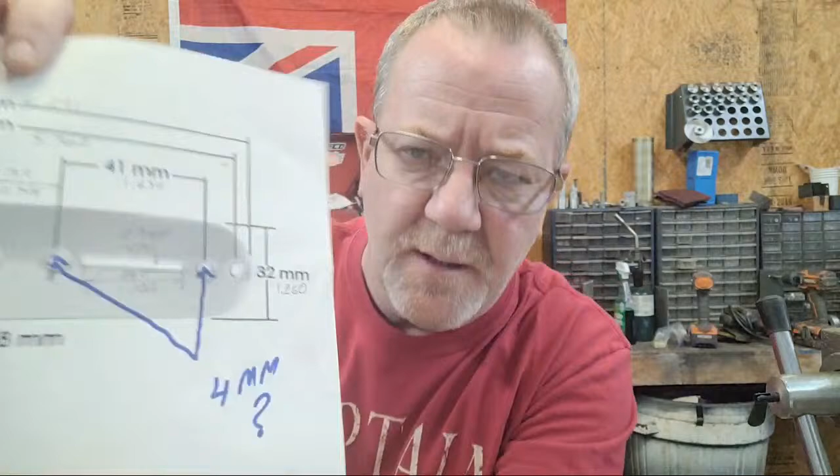And the only other question I had, and we'll talk more about the print here in a minute, was on this print. I'll show it to you. These two holes right here are the holes that you don't want me to countersink, right? My other question, are they also 4mm? Because on this print, it shows that hole is a 4mm hole, and that's the only reference I get to any of the holes.

So if you don't mind, be a good chap and measure that out for me so I don't overcut it. Other than that, I think I've got the print figured out.

I don't know how they do things over there, Carl. You may can enlighten me on this, but over here, whenever I do a print, if you look, the way that they did this print, they give you full dimensions.

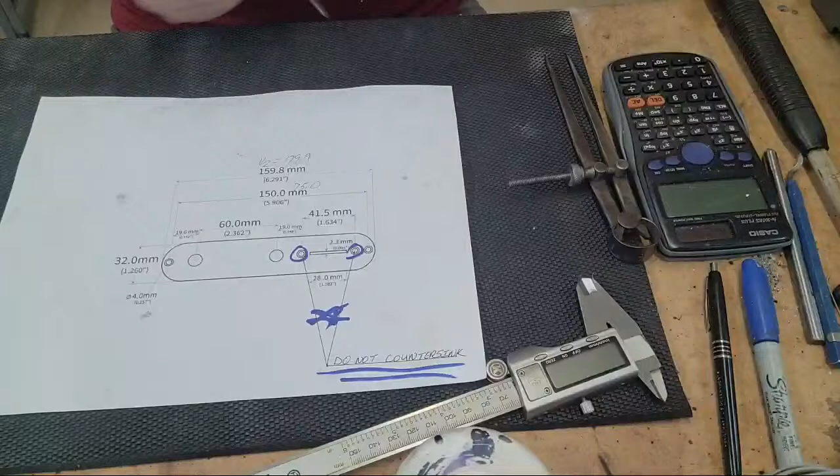Well, whenever I draw a print out, I'm going to turn the camera down to the deck here. Whenever I draw out a print, I usually pick an end that I'm going to start at, like this end.

Of course, I'll give the overall dimensions, but I usually start at this end, and I go - actually, hold on, I've got a picture of the way I do it.

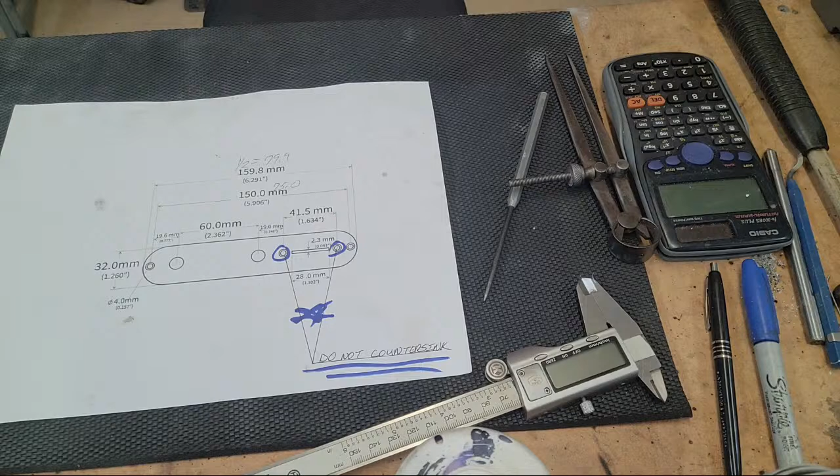All right, this is a little bit better for me to explain to you guys how I do things. So whenever I do a print, I have a starting edge. And as you can tell, each line represents the center of a machine portion. So this would be the center, that'd be the center, this would be the center, and I usually draw the measurements on these lines. Well, the way that this print is drawn...

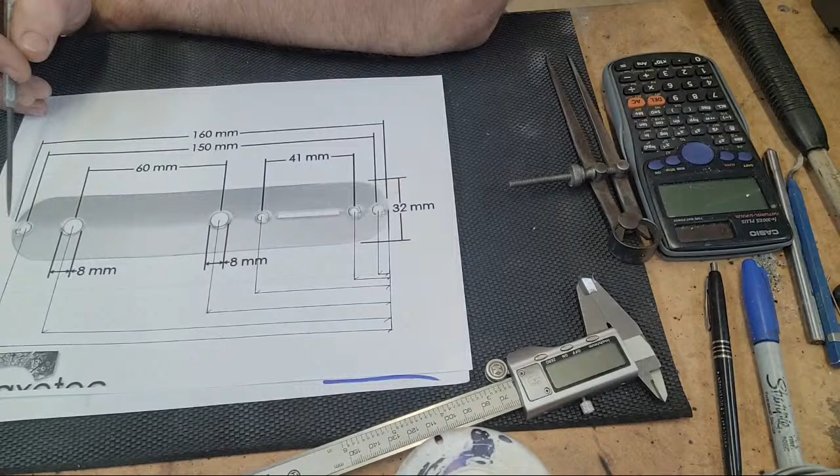It gives me the dimension from this hole to this hole, and then it gives me dimensions from this hole to this hole, and this hole to this hole. Well, aside from these little dimensions right here, I didn't really have a place to start. So what I had to do...

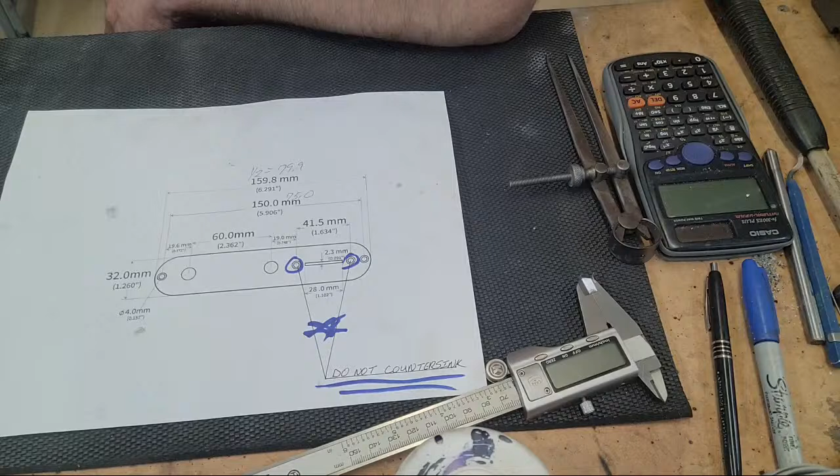And this is the workpiece we're going to be using tonight. I see Charlie just popped in. How you doing, Charlie? I enjoyed the song you did Monday. Good job, buddy. And did you see what Lamb just said also? Put a picture in the Discord.

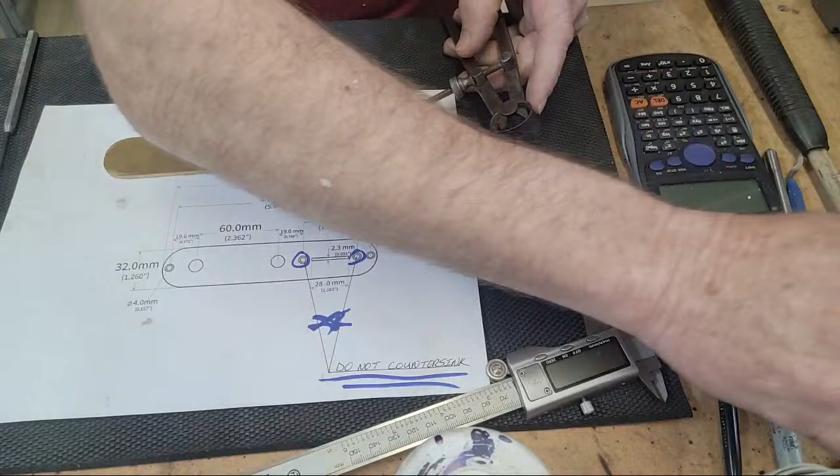Okay, thanks, Lamb. I'm going to pull that up on my iPad right now so I can see that. Okay, I can pull it too if you need me to. No, I've got dual screen on my iPad. Which one? On Lamb's Discord? Okay, you direct message me. I see what's going on now.

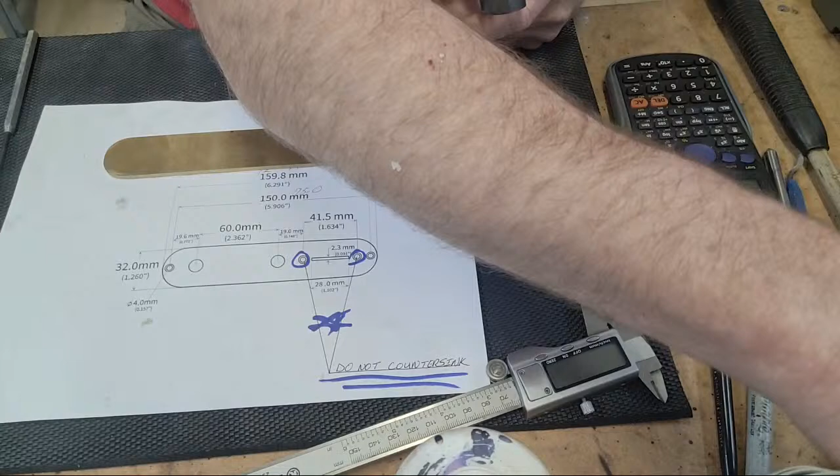All right, I'm having difficulty here. What is the problem?

Oh, okay, I'm assuming this is the picture of the screw holes, right? Okay, so they just used probably like a flat bottom wood screw.

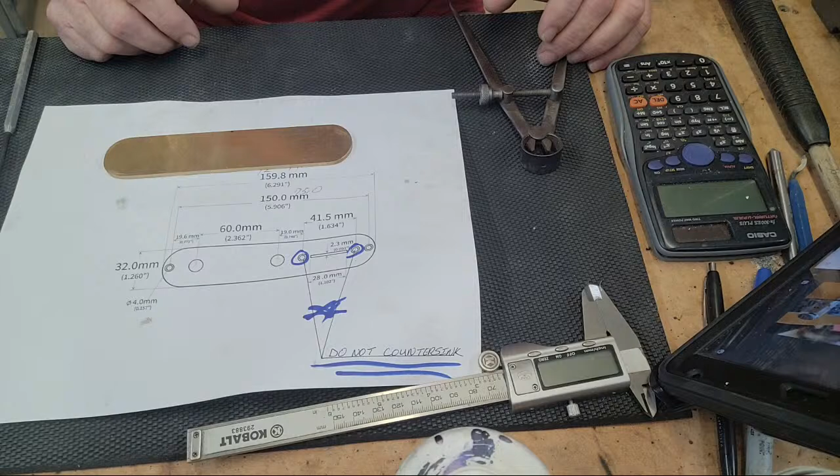Which brings me to another question for you, Lammy. I didn't think about screws for this. Do you have some stainless screws or some brass screws, or are you going to handle that on your end? Let me know.

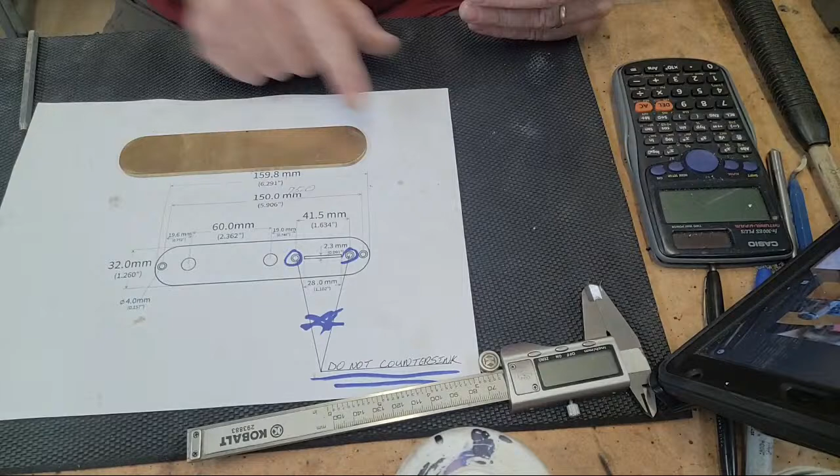But anyway, what I was saying, so I had to measure completely across this piece, find the center of it, divide it in half so that I could figure out and get the proper distance between these two holes, because I don't want these holes shifted one side or the other.

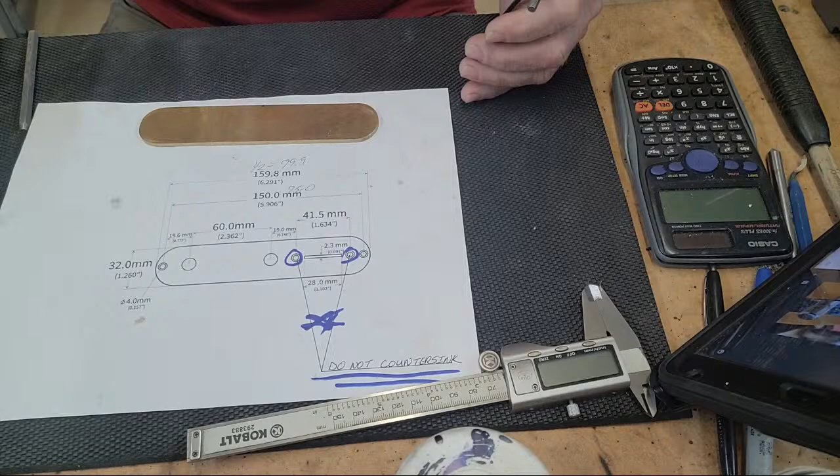So that's exactly what I did. I took and divided all the measurements in half and jotted them down. For example, this one's 79.9, which I've got set up on my caliper already. So I found the center off of this edge here, made a mark, and then I moved in 75 millimeters to this first hole. And we're going to lay all this out here in just a second.

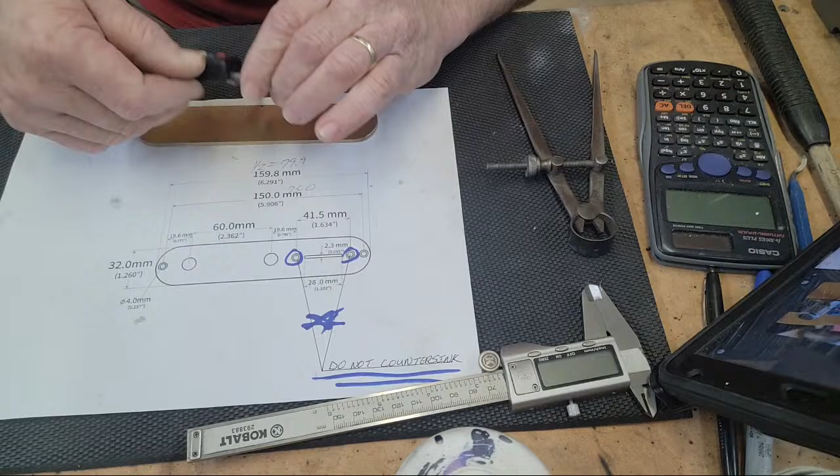But at any rate, I came back to my center point. I made a scribe line there, and then I came to the other side and made a scribe line. So that was really the only way I could figure out how to actually start laying the part out.

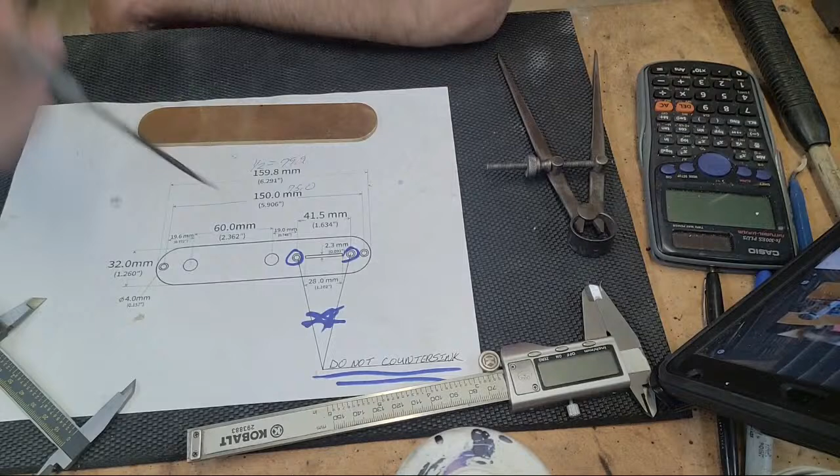So the print's a little bit different to me, but I'm going to be using the DRO. I think what I'm going to do is start in the proper location of this hole, and use the DRO to check these measurements between each one, if that makes sense to you guys.

So, but anyway, Lambie said he's going to use his own screws. Okay, did you catch that? I didn't, but I'm looking now.

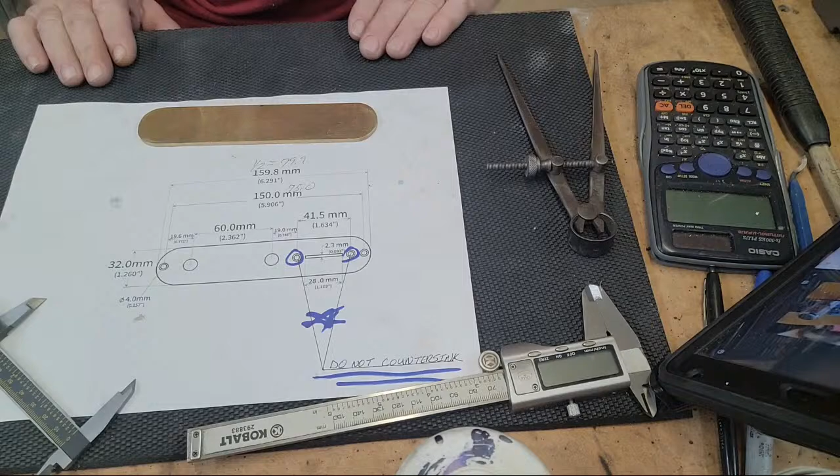Okay, let me get rid of this. I don't need this. I just found a feature on my iPad I didn't even know I had.

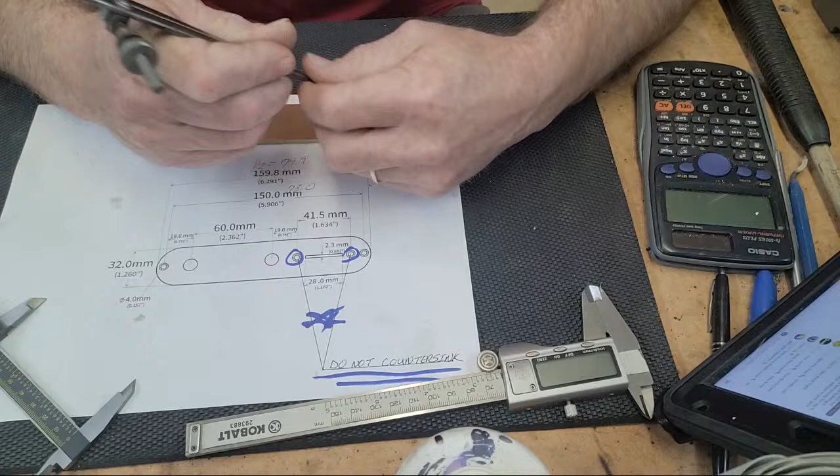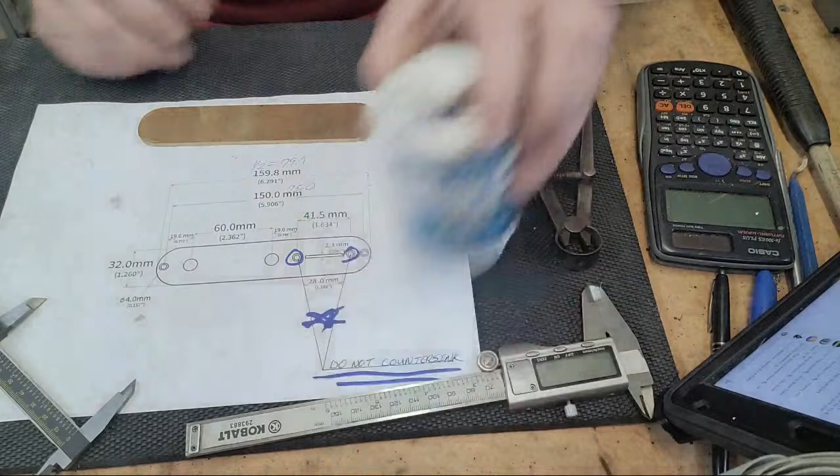And say hi to Tina, I hope everybody's doing good. Yes, hello to Tina, we hadn't seen her in a while, we miss her. All right, let me move some of the stuff out of the way.

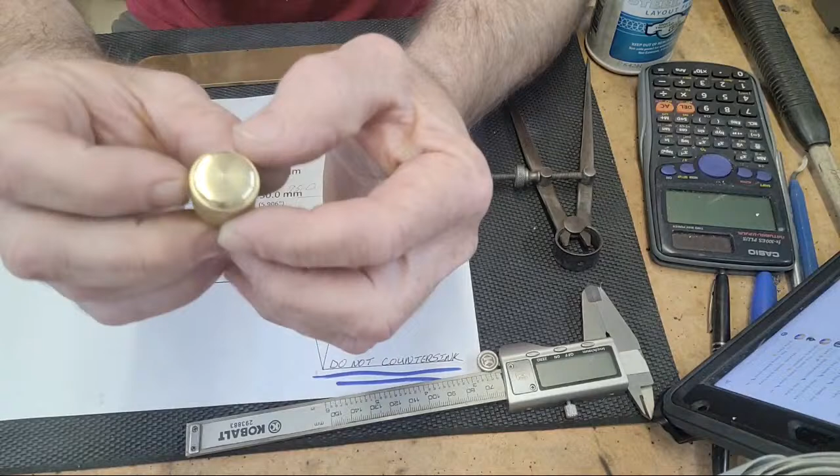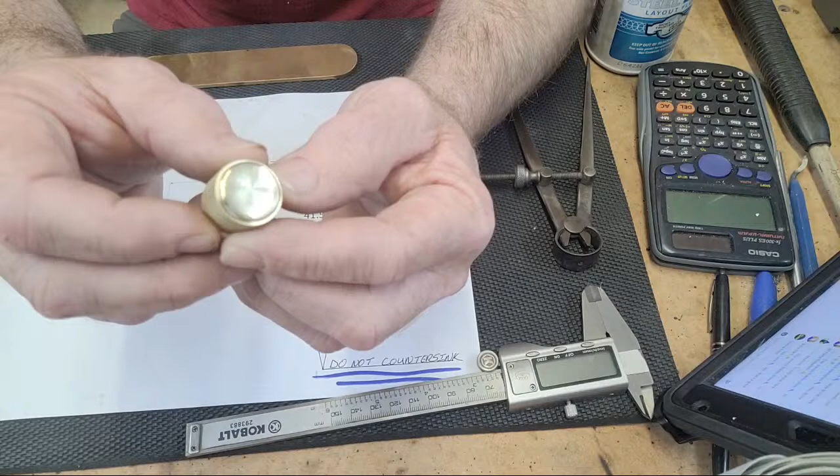By the way, for those of you who haven't seen them, this is one of the knobs that I built for Lammy. Lamb, you see how I turned that over on its edge? I'm trying to get it on the TV where you... there we go, how does that look? I hope you like that. Yeah, he likes it, he says. Fantastic, all right, good, good.

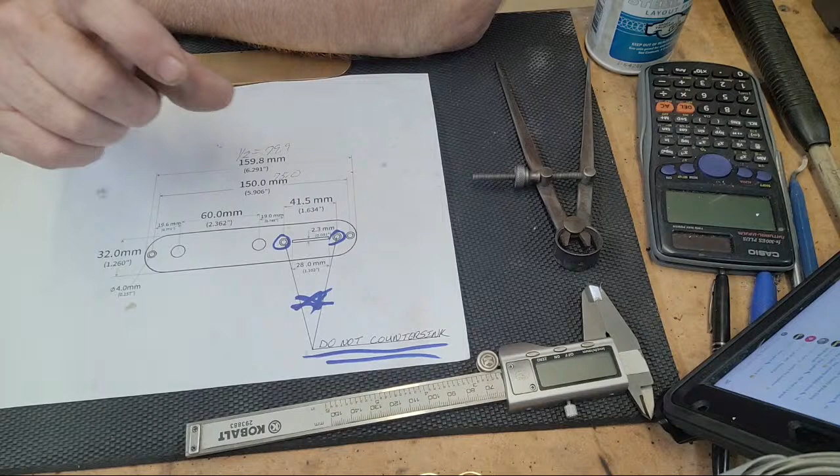So I was talking to some of my buddies at work, telling them about the stream, what we were going to do tonight. And the biggest concern I have with this entire project is this slot right here. That's a 2.3mm slot, and it's 125 thousandths thick material. Well, the only thing I have that I can cut that with, the best thing I want to use, is this little bitty end mill. This is a 2mm end mill.

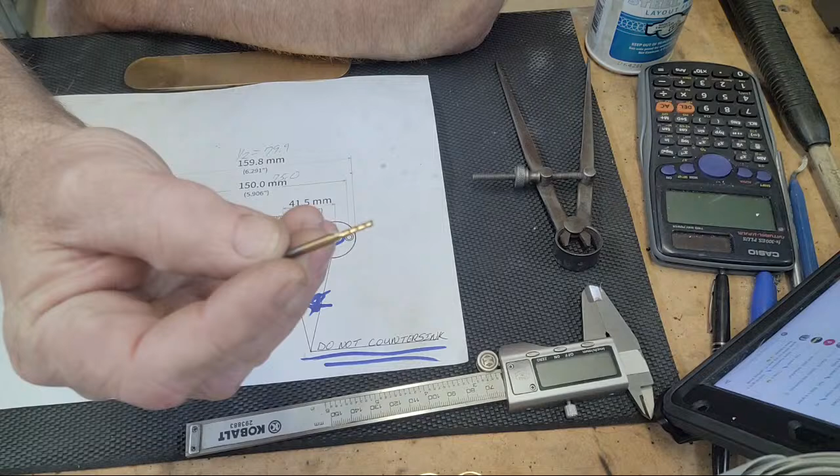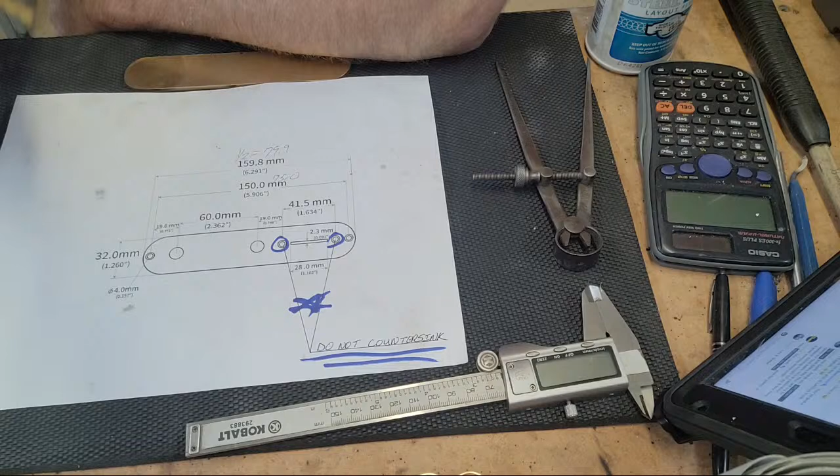Camera's having a hard time focusing. There we go. So what I'm going to do - the way these are made, I can't plunge into the steel, or the brass rather, like a drill bit, because it will break them. These things are super fragile. So what I have to do is drill a pilot hole that's 2mm to stick this down in, and I'll drill one on each end. Then I'll drop down in that hole, and I can only go 10 thousandths at a time - that's the maximum I can do on this bit. This bit's supposed to turn at, I think, 6,000 RPM, and my machine only goes to like 4,500, I can't remember. So I can't get the bit turning fast enough, I have to slow everything way down. But I've used them - they work good in the right configuration and material and all that. You just got to work with your speeds and feeds. Carl, I'm sure you know all about what I'm talking about. But at any rate, that's going to be the end mill we use right there, and it is tiny.

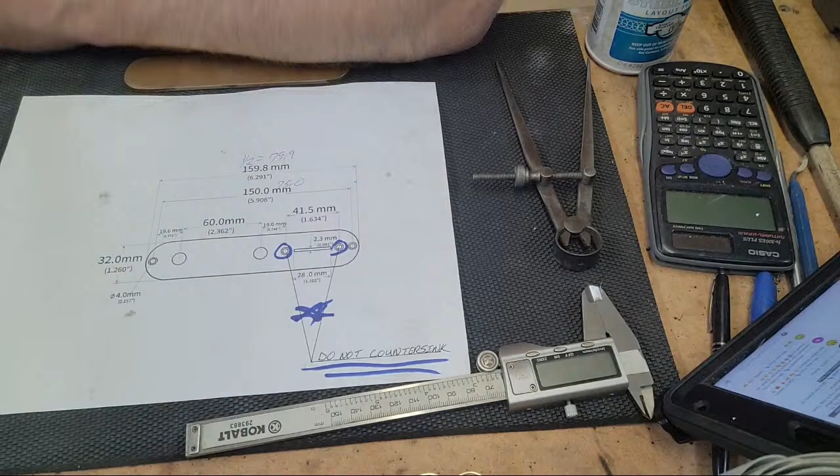I got a couple of things. Okay, if you don't care. Number one, I think I read this right, that today might be Joe Clark's birthday, they're getting ready for a celebration. Oh, really? Yeah, so happy birthday, happy birthday, Joe Clark, happy birthday buddy. And Stigster is here.

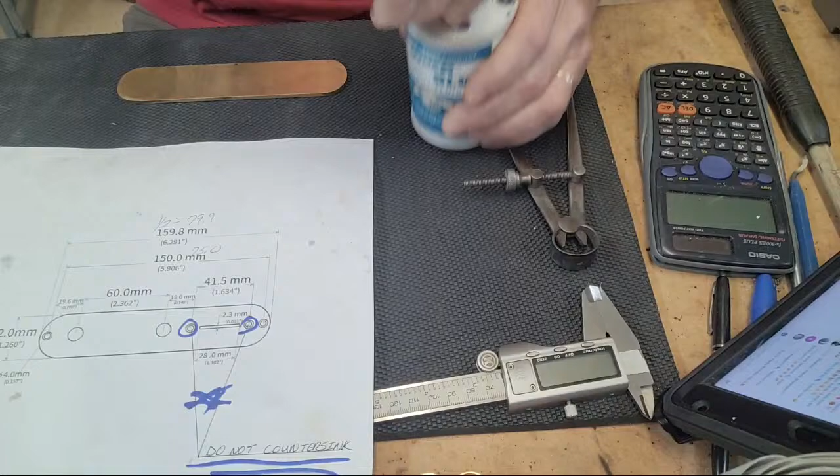Hey Stig, Stig, and Swanton77, how you doing buddy? He's up at the mountain. Yeah, you're in your cabin, right, up in the mountains? And he says it's -2. Oh, God, no, woo, nope. Stig, you'll be coming to see me, brother. I'm sorry, but that ain't going to work for me. You're going to have to come down here where it's warm. I couldn't handle it either, that's too much for me now. Hell no, that's too cold.

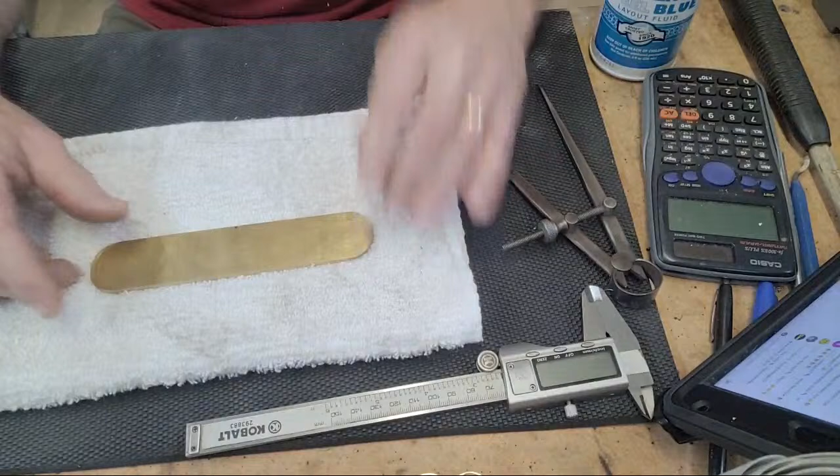Lambie wants to make sure to let you know to give her plenty of lube. I will - actually I have to use, well I can use the aluminum cutting oil that I usually use. What happens on these slots, because I'm cutting such a small amount off at a time, it's almost like pixie dust or something, it looks like glitter. And if I use the other oil, it ends up balling up in that little bitty slot and tries to break my bit. So what I usually do - the first cut, I'll go ahead and use the aluminum cutting oil, and from then on out I just keep my air blower close to it, and I'm able to clean it out so we don't have any problems.

Yeah, Lee, I think Lee knew what was coming next because he said butter.

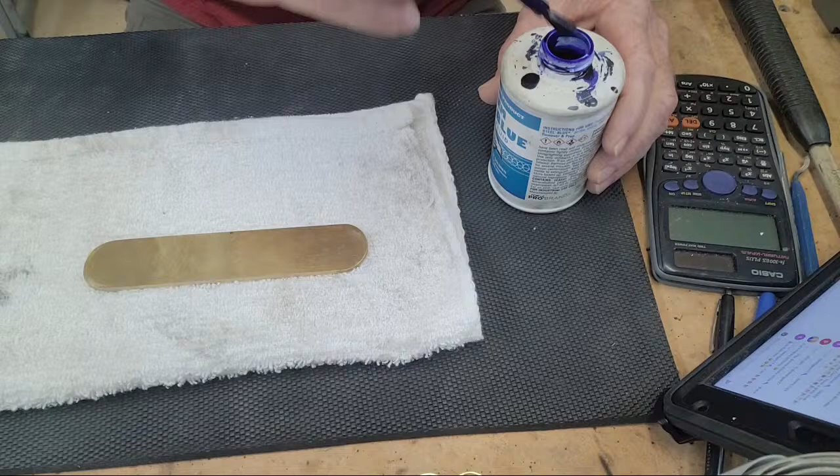I'm just going to take some marking dye, layout dye, go right down the middle, get that. It doesn't take very long, and we'll start setting up. Like I said, I'm going to go ahead and scribe these holes, but I'll be interested to see what the DRO comes up with as far as the accuracy.

There's my 2 start holes right here. Make a straight edge. Okay, where is it? Captain, have you lost something?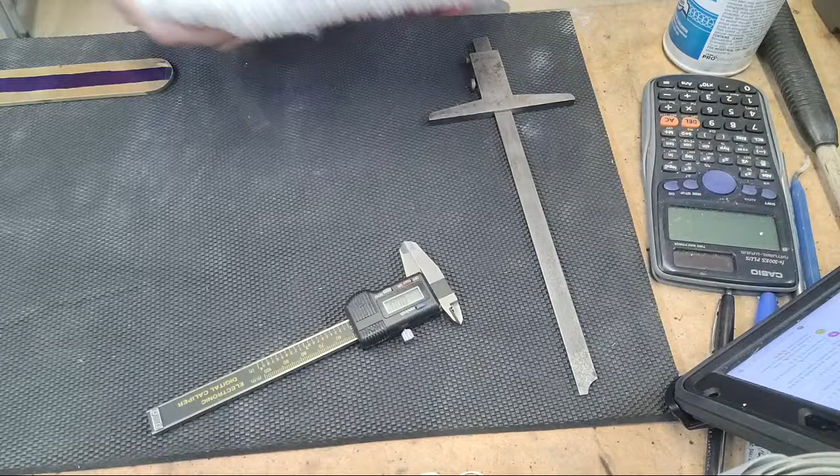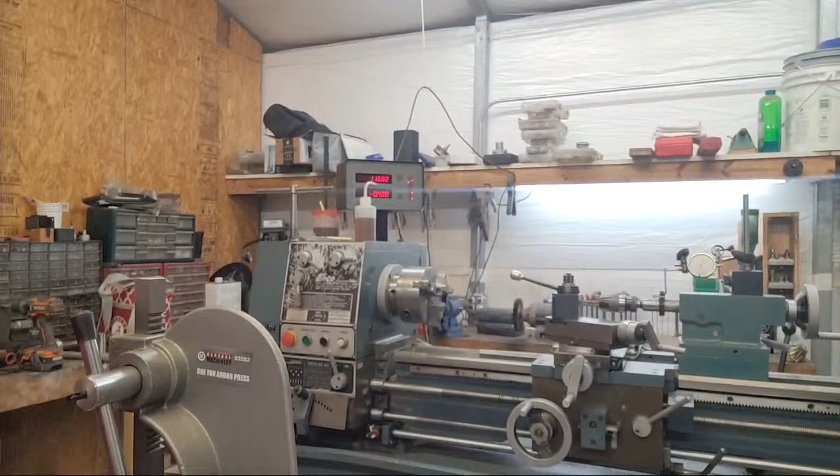No, I found it. Okay, while you're getting ready, can you explain to Lee what DRO is, please? DRO is an acronym for digital readout. Let me pan the camera over here to my lathe. This is my DRO, okay? And what it does, you've got 2 axes. This is the x-axis, so whenever I move the carriage, you can see the numbers move and change. And I can zero it out and come back to the same number. The one on the bottom, if I zero it out, now you can see the cross slide going in and out, or the compound rather. This is the DRO that was in a couple of video backs that I lost my ground in my shop, and it just burned it all to pieces.

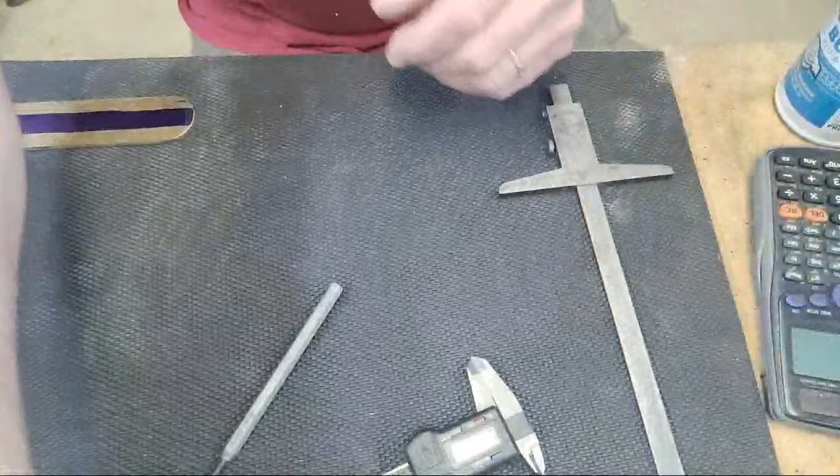Well, thanks to Mark Dennison, I was able to repair it myself with his help and guidance without electrocuting myself, and it saved me about $400 on shipping. I would have had to ship it out to California to get it repaired, and they didn't act like they even wanted to mess with it anyway. So I reached out to Mark, and I'm like, hey man, I'm dying here. And that's a very important tool, because without that tool, you can see most everything I have is digital. I do have some analog needles and pointers and that sort of business, but without the DRO, man, it makes it hard.

Okay, a couple of quick things. Phil likes the smell of the blue stuff. I do too. And Charlie Gabaldon says milling dust is man glitter. I think that's cute. Good one, Charlie. That is a good one.

Dutchman is here. Hey, Dutchman. Glad you could make it, buddy. Glad he came, yes. We're just getting started.

I'm just now laying this thing out, and it'll take me just a little bit to get all the marks where I want them, but hey, that's part of it, right? Mark Dennison says, yeah, we fixed that mother good. We did. I just did what Mark told me to do and tried not to shock myself. Mark did a fantastic job of walking you through that. He absolutely did. That's like his forte. That's his lane. He's really good at that stuff.

All right, I got the first 2 holes laid out, set up for the second holes, and they're going to be 75 millimeters apart. I'm sorry, that's the halfway point between them. I'm getting some real quick.

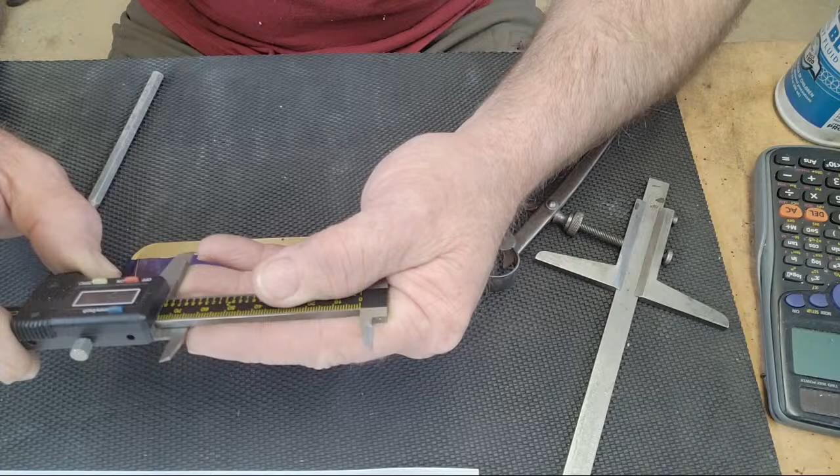Don't let me bother you. Marky D asked a question. I'm going to try to answer it. I don't know if you guys can hear that banging on the door out there. That's one of my dogs leaned up against the door, scratching herself.

Marky D had a question, and I wanted to smell it because he said, can you describe what the blue stuff smells like? Phil may disagree with me. I think that it smells like a really strong nail polish. Strong nail polish? Uh-huh. That's what I think. Yeah, it kind of does.

All right, next hole. Off of that hole, which hole did I go? We're at 19... keep having to... 19.6 millimeters. Is that right? That don't sound right. Yeah, that is right.

And I'm doing this entire part in the metric system. I don't believe I'll be using anything SAE or standard or whatever you want to call it, because I'm really curious to see how accurate my DRO is versus how accurate I am in laying these measurements out.

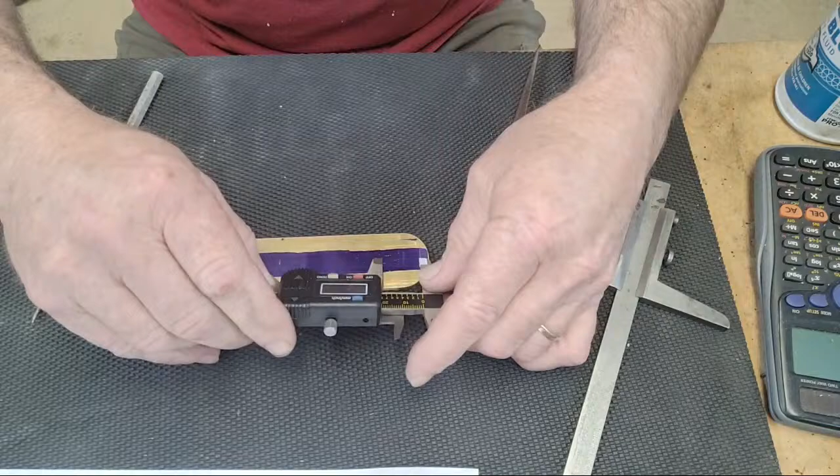All right, there's 19.6, and that's off of this hole. So we'll make a tiny mark there.

Take the straight edge. And Gunter is here. How you doing, Gunter? We're just now laying out this little part to get ready to start machining.

Okay, there's that hole. Now the next hole off of that one's 60 millimeters. So we'll stretch that out 60.

It depends on how, yeah. Well, I'll tell you, I calibrated it and I was shit-faced when I did it, so. Anyway, it is what it is, right? I was so happy to get that working. Man, I was happy about that.

The problem with the DROs nowadays, my DROs are about 10 years old. And for you computer guys out there, how good does computer stuff work after 10 years? Yeah, not very well, right? So they don't make parts for it and all of that. When I called out to California, I was surprised they could fix it, much less. That's probably why they didn't want to. But anyway.

All right, 19 millimeters from that hole is going to put us, let's see, right here. And these are, again, just reference lines. All right, that gives me that hole.

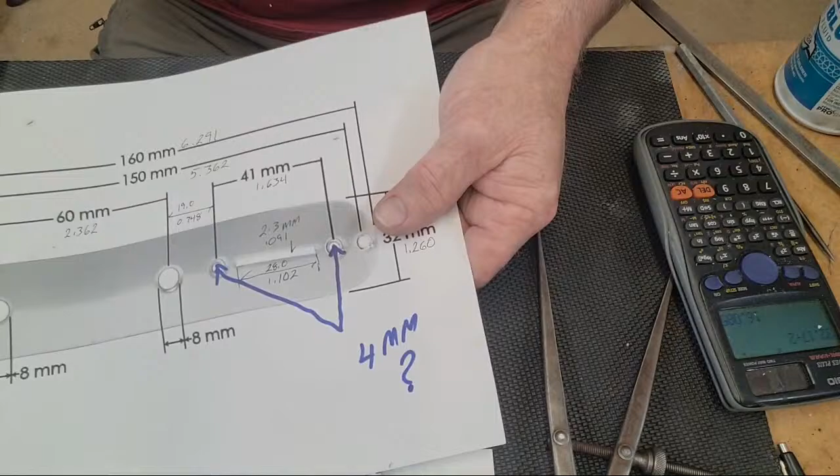I'll do the slot. I want to get the holes cut and countersunk, and then take a look at it, check everything out, because I don't want too many operations going at once. I'd like to do the drilling operations and then come back and do the milling operation. So that's what we'll do.

So I'm going to leave you right here for a second. I'm going to go set this part up in the milling machine, and I'll come get the camera and drag you guys over here. Give me just a second.

Actually, I think I'm going to use this other camera mount. I'm going to switch you guys over to a tripod. Let's see if that does better for what we're doing.

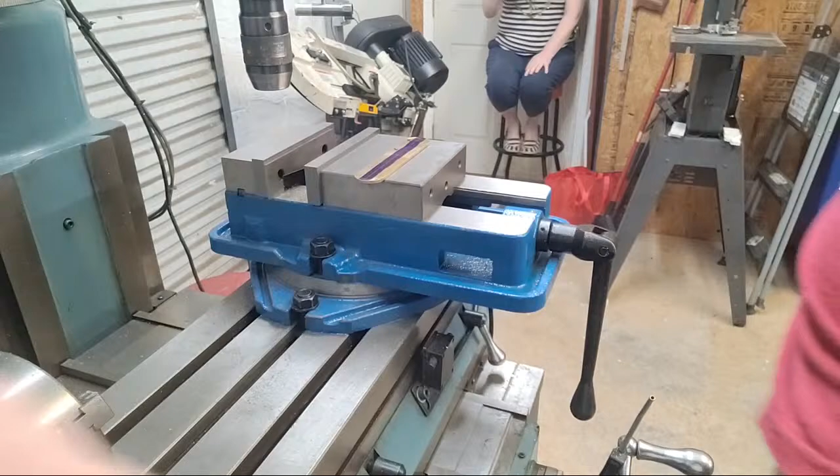Okay. I wonder if I can zoom in with this thing. Way too much, way too much, way too much. All right. There we go. You guys see that okay? Yeah, it looks pretty good on my monitor.

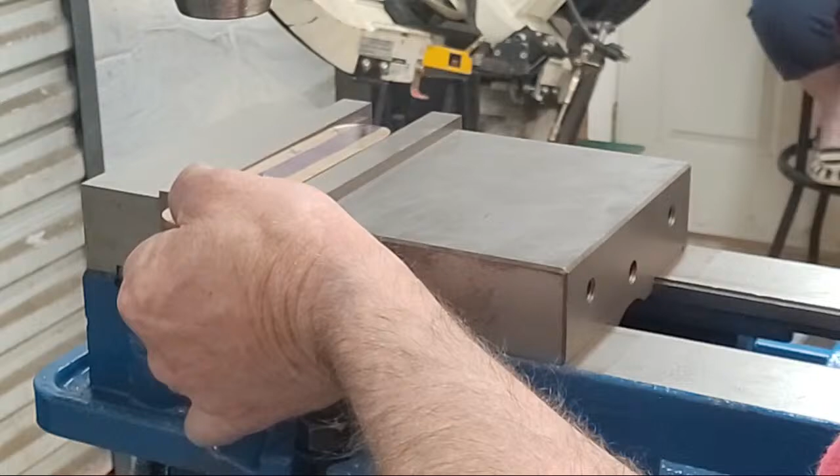Can I read something real quick before we get started that Dutchman says? Dutchman has a lot of experience, remember he used to do a lot of machining before. He says, Captain, you would love having a toolmaker's microscope with DRO, X and Y, micrometer heads to measure your work for small stuff. Yes, that would be badass. I'd love to have that. I'm not sponsored either, so if anybody out there wants to sponsor me, I'm just throwing that out there. You wouldn't turn it down, would you? Hell no, I wouldn't.

All right. Let's see. Let me untangle wire.

Somebody asked me the other day what that humming noise in the background was, and what that is, is that jewel right there. Okay, let me turn you guys back around and I'll explain what that is.

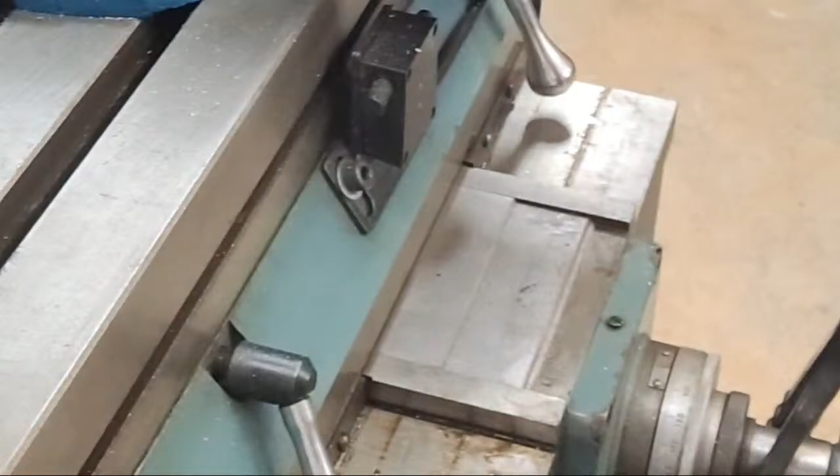Anybody dizzy yet? Yeah, we may have to have some motion sick medication.

Okay, here in the United States, primarily at residence, we only have single phase electricity. What that means is there's 220 volts going to a house, so you have 110 or 220. It's actually more like 115 and 240, I don't know. But anyway, there's only 2 legs of 220 power. My machines take 3 legs of 220 power, like you guys have over in the UK, okay? So with three phase, that means there's 220, 220, and 220. Well, I've got my machine hooked up to the residential 220 power. That's all good, fine, and dandy, but I don't have that third leg of power. What that little machine I just showed you does, it provides that third leg of power for my machines to run. So it's called a phase converter. You can look them up. It's American Rotary, that's the company I went with. They're outstanding, it works great. Charlie has a quick question before you start cutting.

Go ahead, what's up Charlie? He says, couldn't you cut the slot with a table saw, just raise it like a little bit at a time, is what he's asking. And the answer is yes, I could have. The reason I chose not to do that is because I would have had to cut it upside down, and I actually almost did that with my slitting saw. But I chose not to do that because the saw blade is round and I don't have one small enough to penetrate the entire part. So no matter how perfect it would have been, I would have had to take a file and cut away the round part that didn't get cut. That's the only reason I chose not to do that. But yes, I could have done that. If it had been a longer slot or I had a smaller tool, that's probably what I would have done.

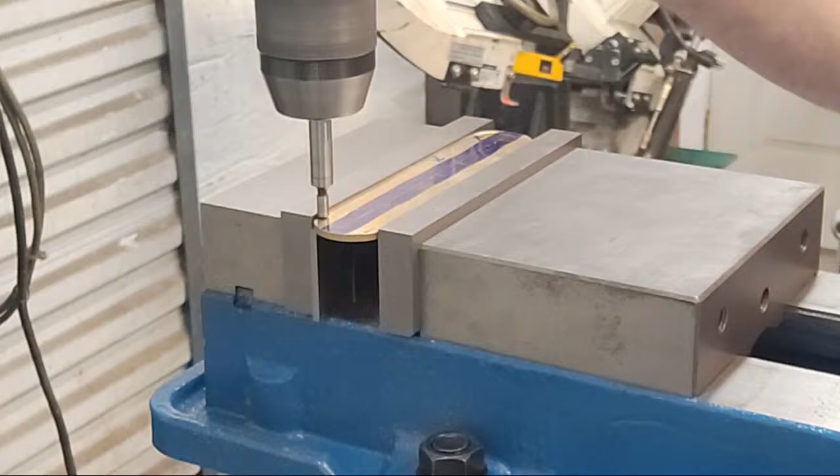All right, let's find some edges. The first edge I'll find is the back side, and then come to the front side. All right, there's the dead nut edge on that one. We'll go to this side.

Now that we've got the edge, the back side. Now that I've got the edges, that helps me to find the center of the workpiece, which is what I'm going to do now. And I'm going to explain something.

I think Carl was kind of confused the way I find edges, and I know it drives some people crazy. This is 200 thousandths, so what I do is I butt up to the corner, and once it kicks off to the side, that tells me, okay, that's my measurement. I add 100 thousandths to put me on this edge. Well, I do the same thing over here, and the only reason I do that is to have one number to divide, and that's the way I was taught. That's just the way I do it. So if I'm driving you guys crazy doing that, it'll just have to be okay. I don't know what to tell you.

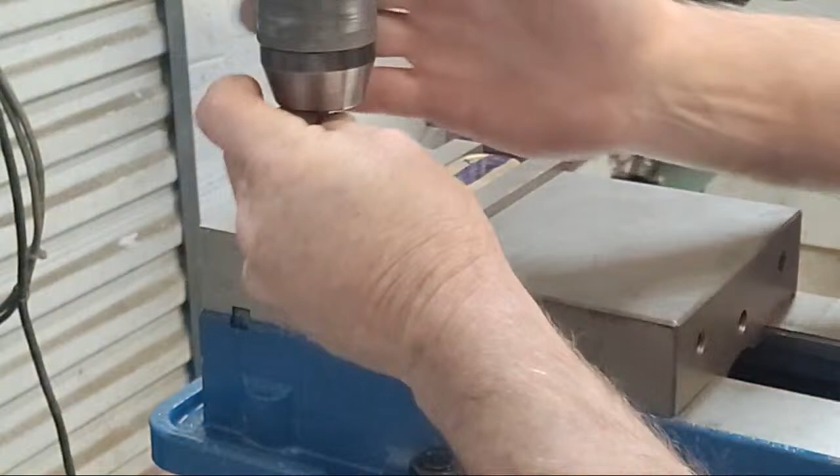All right, let's see what this works out to be. Huh, okay, that worked out pretty good. It ended up dead nuts where it was supposed to. That's always a good sign. A good start.

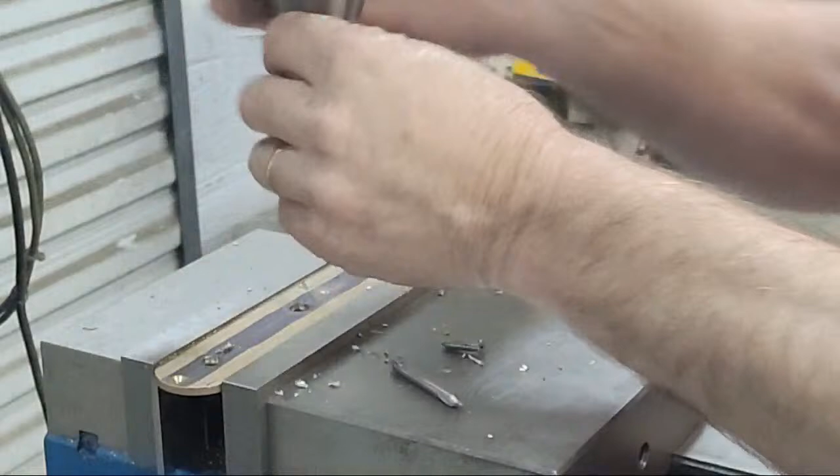Back to the 4 millimeter. I'm going to double check that, 'cause I'm pretty sure that's what it is.

Lanny says, Captain, would you be so kind as to stick a signature mark on the other side, please, with the hearts? Signature mark, yep. I guess he wants you to sign the back of it. Okay, I'll do something.

Yeah, because I'm not going to finish this tonight, fellas. Or, I'm sorry, friends, guys and gals. They know. I'm going to finish the machine work tonight, but it's got to go through a whole other video of polishing it and cleaning it all up. So I'm just doing the machine work on it tonight, and I'll clean the blue off of it so you guys can see what we're working with.

All right, next move, 41.5. Well, I hope this print's right, Lanny. Well, I'm going exactly by the print in the DRO.

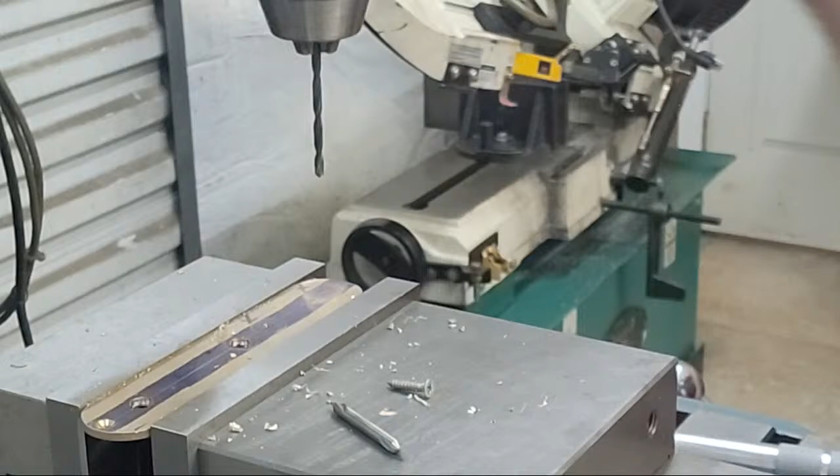41.5. Well, if not, there'll be a meltdown at the end of this, so everybody stay tuned. Yeah, don't send the captain anything to machine if it don't fit. Well, I'm not going to know if it fits until he gets it.

That's right. And another thing I thought of too, Lam, when you screw this thing on, there's no guarantees that our holes off of this blueprint are going to match the ones that are on your guitar. I don't know what we'll do then. I don't know, but anyway. Well, let's just pray it all works out perfect.

All right, this is the second mount hole. And I can tell these measurements, although correct, I'm seeing the error in the caliper because I'm probably a millimeter off that line now. So yeah, there is some error in the calipers, so don't trust them when you're doing that precision work.

Lanny says he can easily plug the existing holes and make new ones. It will all be under the plate anyway. Oh, okay, all right, okay. It was just a concern. I was hoping that.

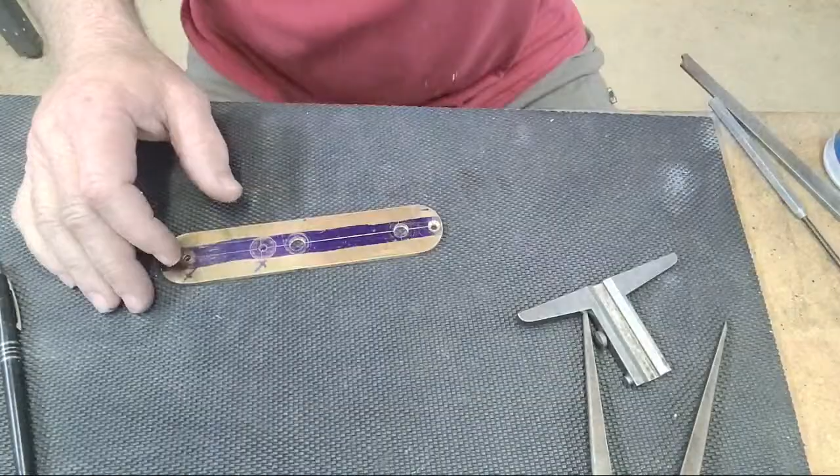Fun stuff? Anybody? No? Charlie Gabaldon says, I heard Chuck Norris say, if Captain can't make it, you don't need it. That's awesome. Hey, I'm going to get me a t-shirt printed up, something like that, Charlie. I thought about that, and I've got a friend that does t-shirt printing, so I think it'll be cool.

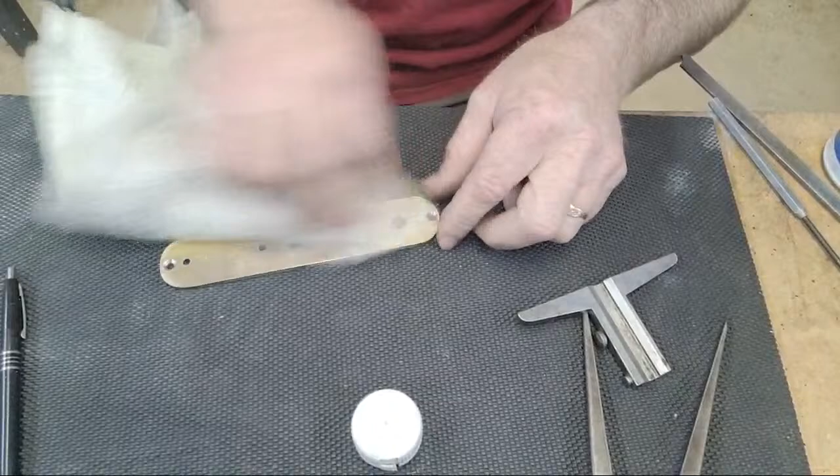I'm just using some lacquer thinner to get all that off.

Oh, I think Swanton's got to go. I think he's going to the pub or something. Okay, all right. Later, Swanton. If you're leaving, bye, Steve. We love you, we'll see you soon.

Okay, so first things first. This piece, this slot is 28 millimeters long. So here's what we got to do. We got to find the center point here, and then we'll go out half of 28 millimeters. Let me get my calculator.

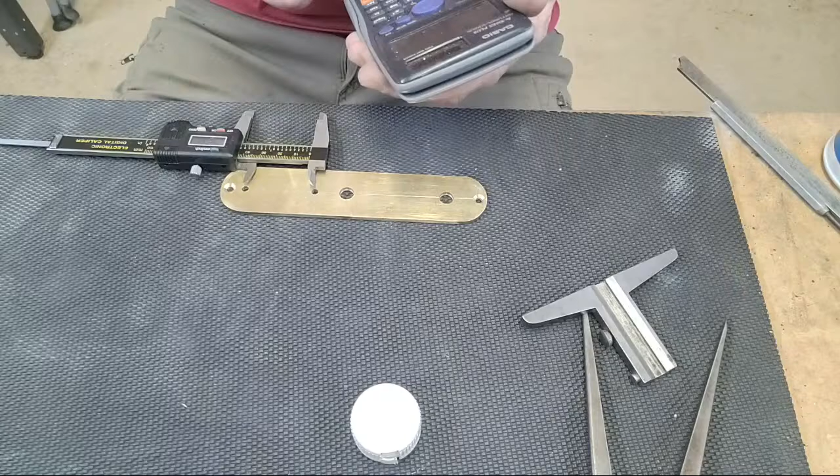Let's find the center. All right, that was 41.5 millimeters, and that's what I've got in here. So 41.5, so 41.5 divided by 2. 41.5 divided by 2, all right, 20.7. I'm gonna set up 20.7.

Okay, 20.7 here, I'm gonna make a mark. I'll come over here just to check it. All right, that is dead center right there between those two holes. Put a little marking dye on it just so I can see when I draw this line.

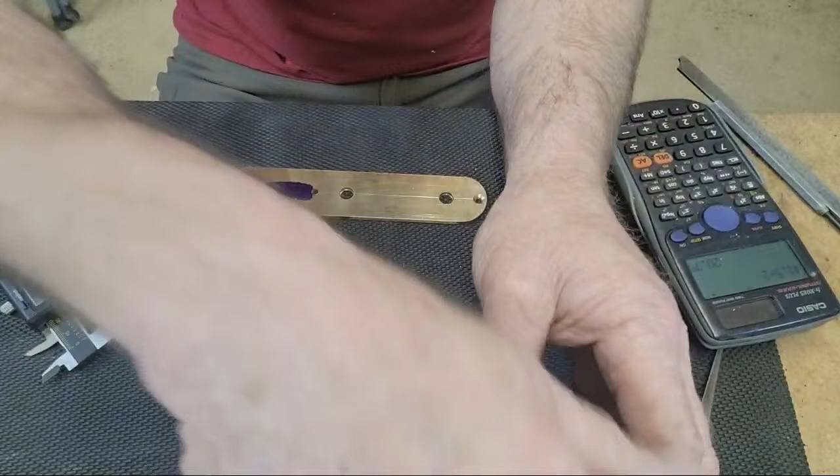Yeah, that stuff does smell weird. Very painty smelling. It is, yeah.

Lee S. says he loves the accuracy. Thank you. Of me or the machine? Yeah.

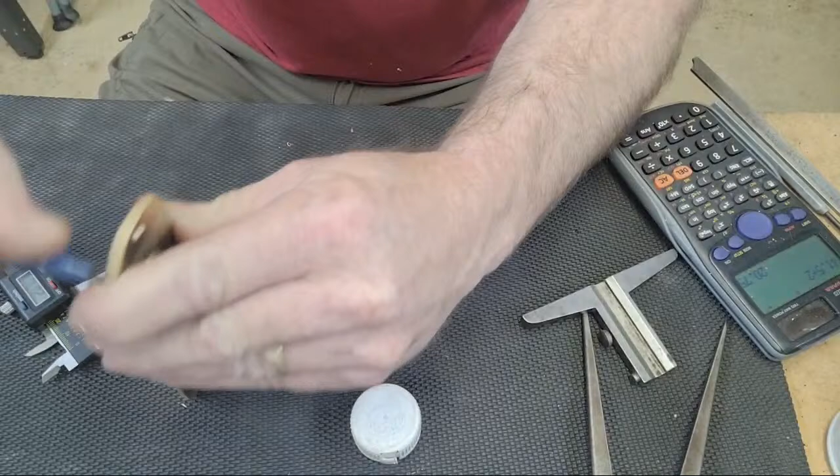Alright, so I'm just deburring these holes. And Lamb, when I polish this, where the holes are at, a lot of that'll be a lot smoother.

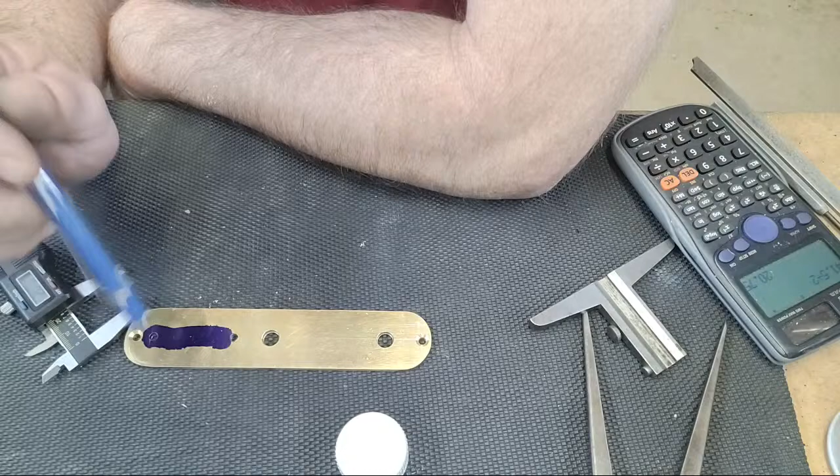Okay, let me tell you something while you're talking to him. He says, can you drill center and then mill out to each side? Yes, I can, but here's the problem if I do that. If I start in the center and go each side, I don't have a stopping point. And you'll understand that here in just a minute. What I like to do is drill the pilot here and here at the end of the run so that I can sink the bit down 10 thousandths, come to this hole, sink it 10, and go back and forth. If I do it any other way, the only time I'm going to be able to drop it down is when I go back to center. It just makes it a little easier doing it the way that I was telling you guys I'm doing it.

That's all it is. Hey, Rita H. Rita H, Rita H.

All right, remark center. Now then, 28 is 14 millimeters. So we want 14 millimeters on each side. Okay, so that gave me 14 millimeters.

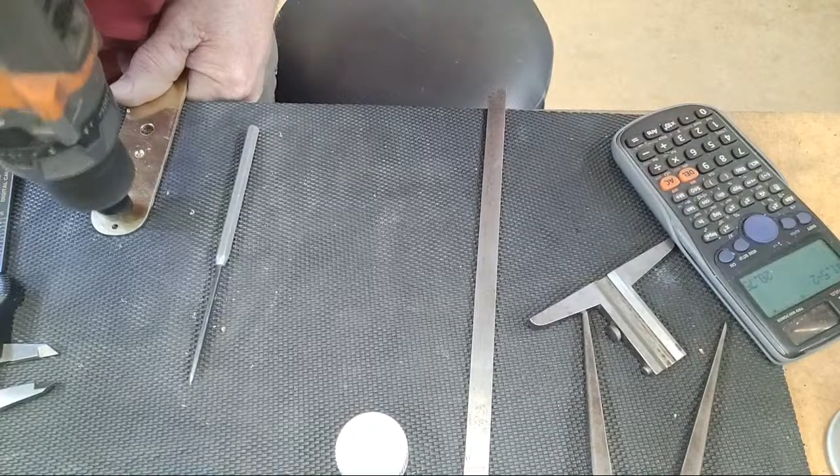Hey Lamb, would you look right quick on your plate and see if there is a little bit of clearance on the switch when you throw the switch all the way to one side or the other? It's not hitting the plate, right? Because I don't want this to hit the plate. He says, yeah, there's a fair bit of clearance. Okay, I just wanted to make sure.

Okay, all right, so far so good.

Okay, Marky D's headed to the pub. He's gonna play his keyboard there at the pub tonight. I'm jealous, by the way. Oh, that's cool. So they get to see Mark, but we don't. Yeah, it's kind of crap, isn't it. Yeah, I'm just gonna call BS on that one.

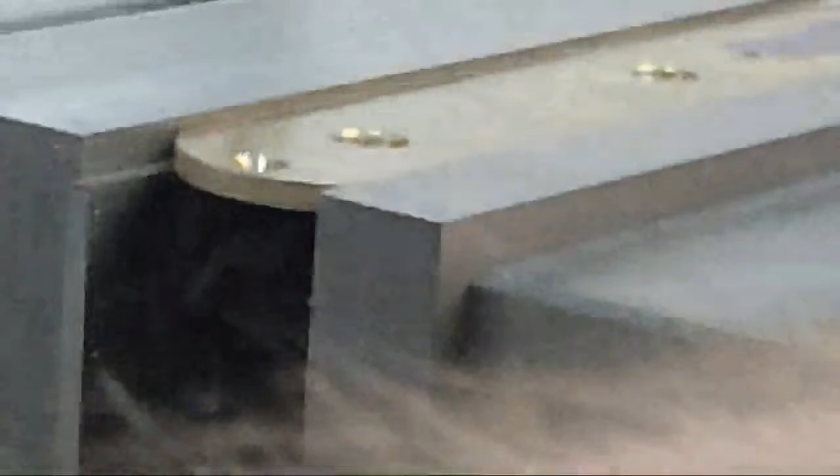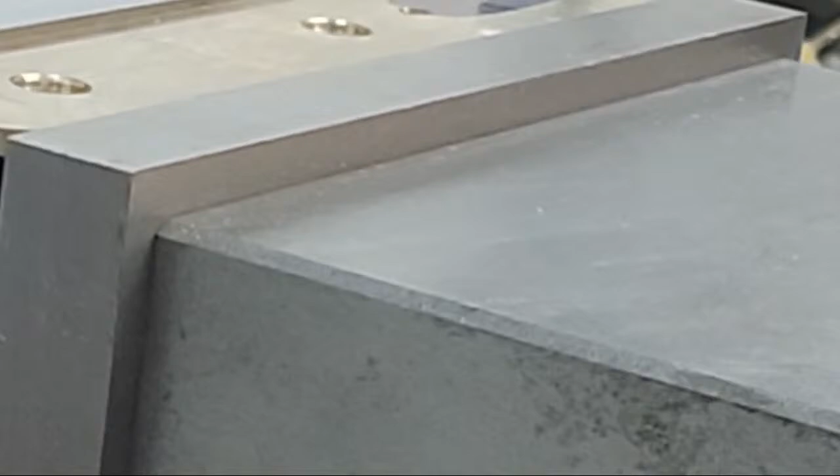I'm not sure if you guys are going to be able to see that when I start milling, because of the way this is - actually if I turn this around you may. Is there anything I can do? No, it's the little camera holder thing giving me shit. Let me try this. That might actually work. Alright, I'm going to try that angle right there because any other angle it just ain't working right. But anyway, we'll try that.

Lady says that looks good.

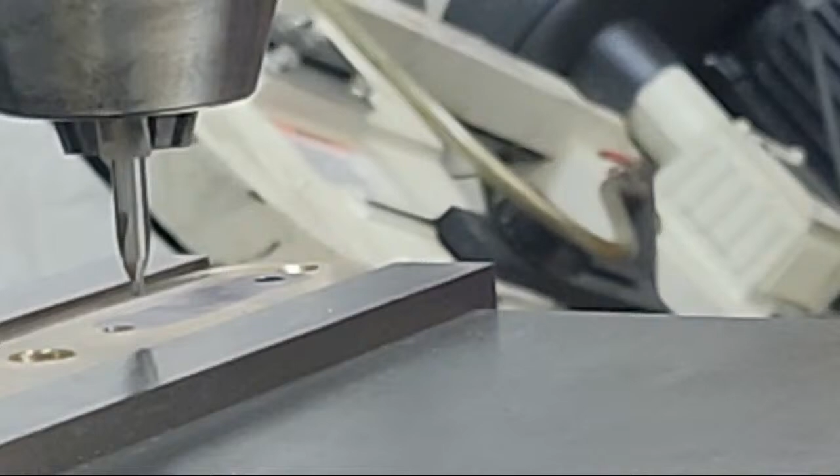Zero the DRO on that. All right.

Charlie's messing with you now. What do you say? Well, you know Charlie, he's a cut up anyway. He's so funny. He says, oh, you made it upside down. Ha ha ha.

Yeah, actually at this point, it could go on either way. I just had to chamfer the mounting holes. All right, hole one, what did I say that was? 28 millimeters. All right, let's check the measurement. 28 millimeters, booyah, right in the right place. Okay.

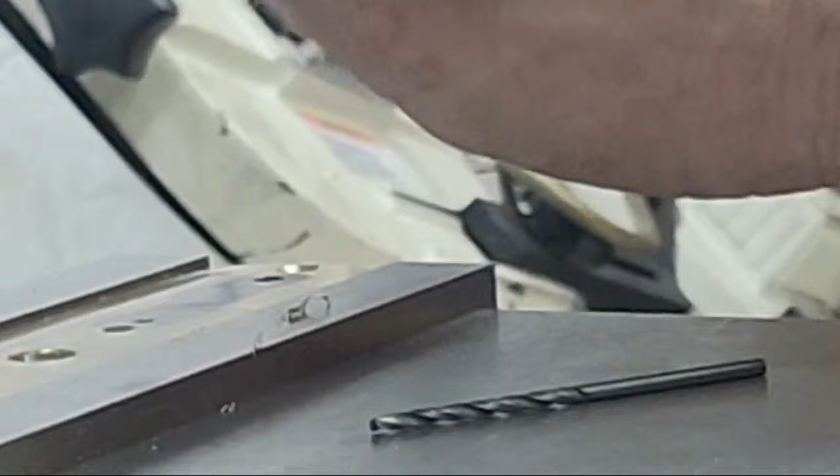Actually, I'm going to give just a touch of clearance on that. He said there was a fair amount of clearance. Yes, he did. He sure did.

I'll tell you what, when you get to messing with these small drill bits with this chuck, I really need a smaller chuck. But we make do with what we got, right?

Bye, Bill. William Pagaducci's got to leave. All right, good to see you, Bill. Glad you came by. He just got back from his Florida trip, so he's got stuff to do. Oh, that's right, I forgot about that.

All right, can you guys see this drill bit? Give you an idea how small it is. That's how small that end mill is. So I've got to be very, very careful with this thing. We'll all hold our breath when you tell us to. I know, right? And that's as fast as my machine will go.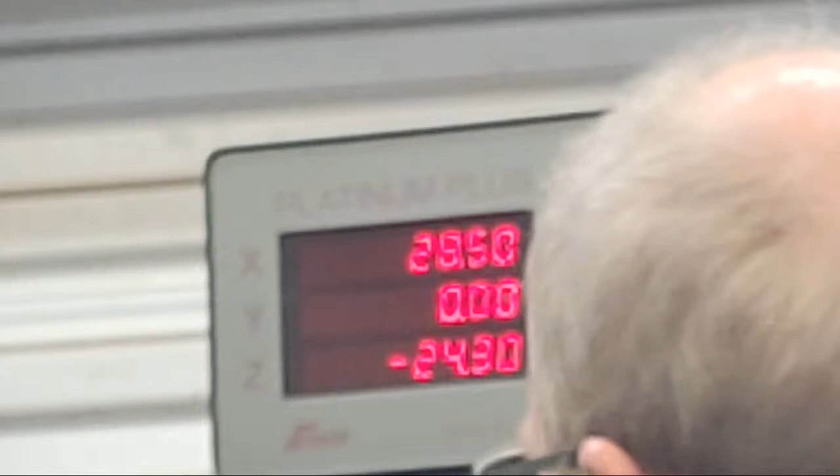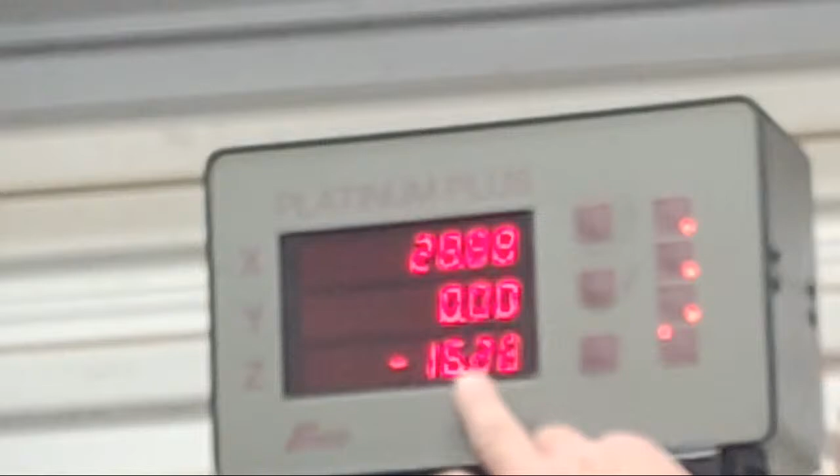You find the DRO. Where the hell is it? There it is, okay. So this is the milling machine DRO, and what I was looking at is this number here. 28.88 millimeters, okay, 28.8 millimeters, and I would stop it there, plunge the depth a little bit more, and that's the Z, the bottom number. Like I said, I can only go right at 10 thousandths, and if y'all kept up with the amount of cuts, do the math on that for a 125 thousandths piece of material. So anyway, that's how I used it to know where to start and stop.

Clear as mud? Clear as mud.

Rita is complimenting your shop here. I don't think she's ever actually seen it before. I don't think so, I don't think so.

Where's the rag at? Is this table talk time? Yeah, okay, I'm just going to clean this part up. I'm going to go ahead and start moving my little stool over there beside you. I won't get right next to you so you can work. We've kept them a little longer than normal, so I appreciate everybody staying.

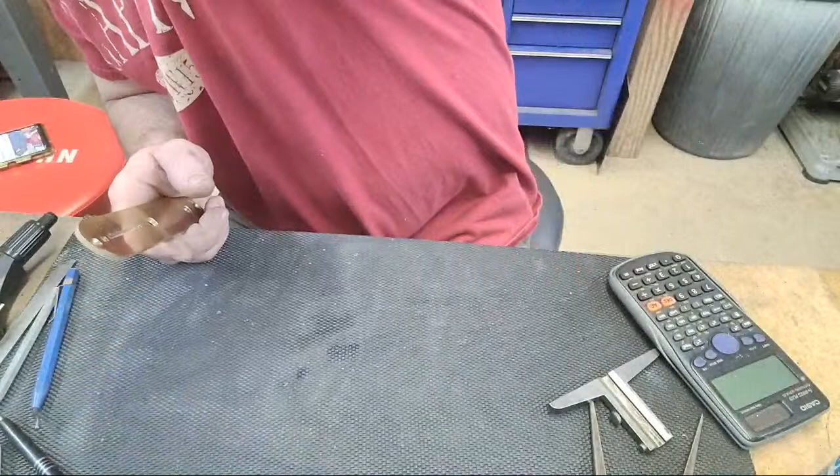All right, so what we have thus far, I need my little cheat sheet. Okay.

Take a look at that. Take a gander at that, Lammy. What are you thinking, buddy? I can get a little closer. Yeah, I probably want to get as close as you can, I know he probably struggles to see. So far, that's what we're up to right there.

I've got a little deburr to do, and like I said, I'm not going to polish it on here. God, that'd be a whole other hour and a half show. But I've got some deburr, and you can see a little burr inside there I need to take care of, and I need to deburr these, but not chamfer. The slot turned out fantastic.

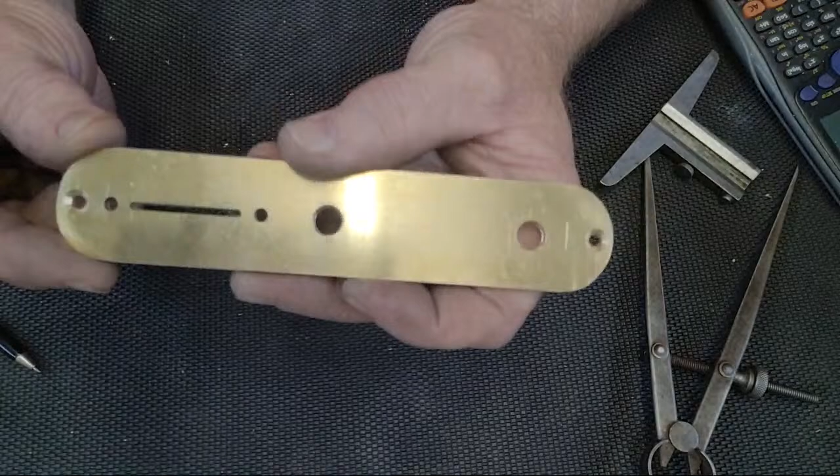How does that look? You like that, buddy? He says to my eyeball, that looks very good. Good, good, good, good. And Phil, thank you. You're getting bragged on there, baby.

All right, why is it not showing up on my... You're talking about the chat on the big screen? Yeah, well I think you may have to get rid of that. Do you see that thing there? Yeah. But honestly, I love this new big screen you put in, but I'm going to tell you, the chat doesn't stay up very long. Have you noticed that? Yeah, I know that. I have to read more out loud to you because for some reason this TV is much bigger than what we had out here when we first started doing this. But the little TV held the chat so much longer. I must have hit the chat button and turned it off on my monitor, I couldn't see it. But at any rate, there we have it.

Is the trainer here? Well, yes, you've been here the whole time. I'm sorry, I got busy and didn't acknowledge you. I actually said hi to her at the very beginning. Look at you, bless your heart, you really were concentrating. Can they even see it? He's dripping, he's sweating like crazy. I even got the air conditioner on. Hi everybody, I have never gotten to say hi to Rita before. Hi Rita, it's good to see you.

Let's turn this bad boy down a little bit. I'm actually sweating in here, and I know you are too from all that concentration. Oh, that air feels good. Okay, but anyway,

Lammy, I'll finish this off camera. I've got some sanding and polishing to do, but man, I think it turned out okay. I think it looks pretty good. And I'll put something on the back here for you.

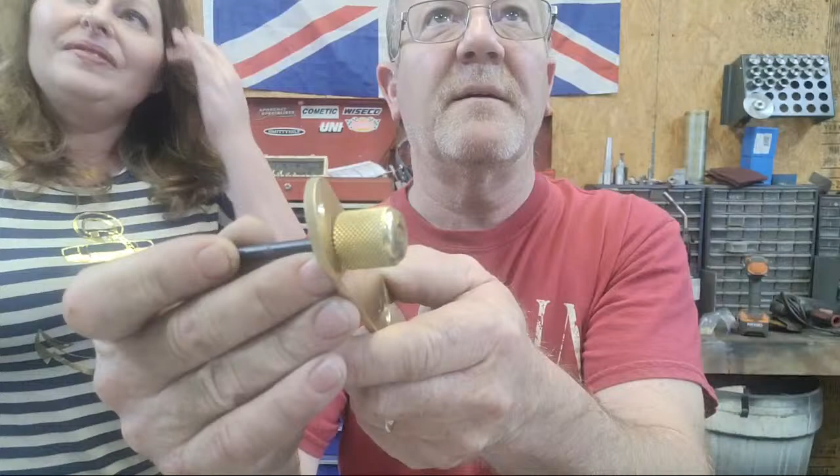Okay guys, oh wait, Phil wants to know how thick it is. He says, how thick is that? Right now it's an 1/8 of an inch thick. I just used that 1/8 stock, and here's the thing: whenever I sand this down for polishing, it's going to round all these corners off. That's why I sand it on this pad that I've got here, so that as I sand, the part kind of wobbles and moves around.

It really does a nice job deburring the edges all the way around. Ultimately, it's still going to be about 125 thousandths, 120 thousandths. I will lose a little bit through the polishing process, but it's negligible. One thing I am kind of concerned with, Lammy, I'm assuming the switch goes through here, and then this goes on that, or is this just a cover?

Yeah, I think it's going to look pretty good when you get it on there. I'm hoping you don't have to modify it any, I hope it works right out of the box. The knobs sit on top. Okay, I think you should have plenty - there should be plenty for the jam nut or the little screw to grab onto. So that should work just fine. If not, we'll start over.